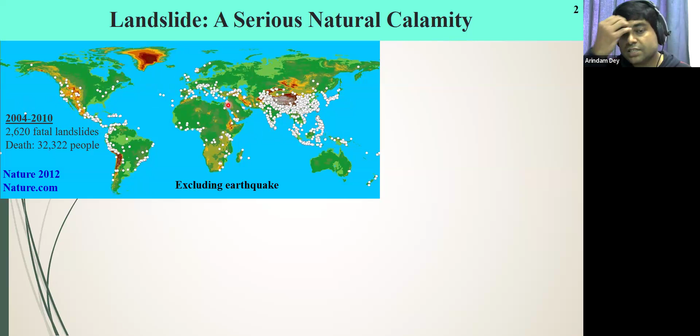India, China, the Southeast Asian countries, the western coast of South America, North America, Panama, all these places are severely affected by landslides. Italy, France. So wherever we have these mountainous terrains, we are basically looking into the potential threat from landslides. Mind it that this map does not include the earthquake-induced landslides. So many of the other regions would have been covered by those white dots.

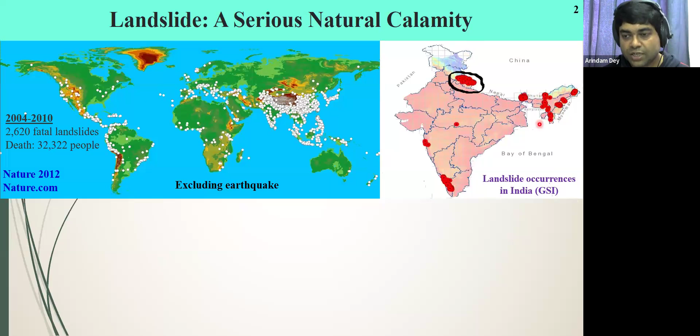Some examples which we come across in the news, the literature, the documents, the media articles. All these sorts of landslides and catastrophes create a lot of havoc, not only to the infrastructure, but also to lives and the economy. And in most of the cases, if not all, the population growth, the urbanization, development in the difficult terrains, one way or the other cause such landslides. And over the years, the number of fatalities keeps on increasing.

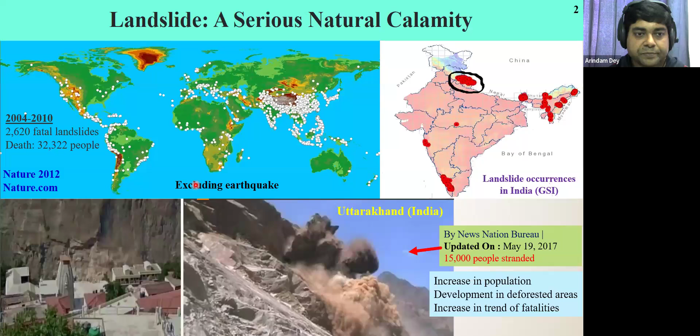And as geotechnical engineers, we are supposed to look into some of these issues and problems and try to avert them as much as possible. We cannot stop it from happening, but we can definitely take many necessary steps to minimize its effect. But those are discussed mostly in terms of soils and earth flows, mud flows. Now, when we come to rock slides, this presents a very unique feature. In case of soils, mostly we consider them to be homogeneous, or heterogeneous in some advanced contexts. But in rock, the feature of discontinuity presents a very complex structure to be handled.

And frankly speaking, the fundamental ways of slope stability analysis, how we handle soil or earth slopes, many a time do not really work for rock slopes, especially when discontinuities and joints are present. Just to show a few examples. So this is a jointed rock. You can see it's a huge mass of batholith. So we have intact rock, but through the intact rock, the joints are passing. Now, if you have to analyze such cases, you have to take into consideration the characteristics of both the intact rock and the joints, which we generally do not consider in slope stability analysis for soil or earth slopes.

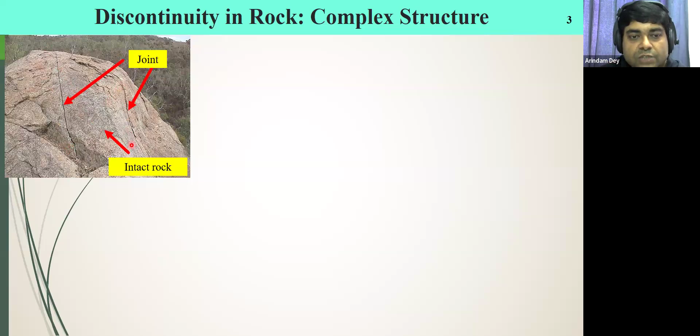And this is only a rock with intact rock with two joints, which you can visualize. It can increase in complexity when we talk about the joints, their intersections, as well as the bedding planes, which all come from the formation of the rocks and upliftment of the rocks during the prehistoric era. So these interactions now create a very complex situation.

So neither is it a continuous medium like soil, nor is it a completely discrete medium of two different elements. So it lies somewhere in between. And whenever an engineering problem comes which does not follow the binary rule, either this side or that side, then the problem keeps on increasing for us.

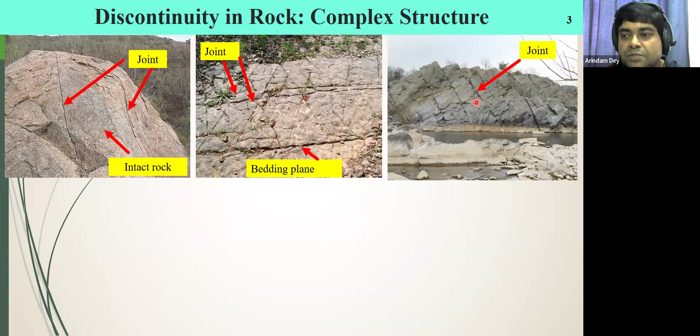This is another such jointed system, which we call a cascading book fall. So if you keep the books in the rack of the library or your almirah, and if you just push them, they just drop over one another and take such a shape. Now, such types of jointed rock systems are present in many places, creating difficulty for us in how we should analyze them. Our normal slip circle method, Bishop's method, may not be able to handle all these situations.

You can increase the complexity by placing the joints more closely. So here you can see a closely spaced joint system, and imagine that you have to solve it through a friction circle method. It's virtually impossible, because each of these joints might give a shear plane or might emerge into a failure plane, and it may not follow a slip circle type of definition.

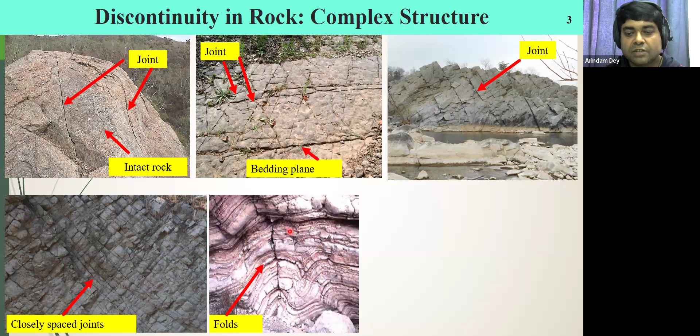Then come folds. So you understand folding and faulting, the way the Himalayas are built by upliftment due to the pressure from both sides, and that leads the depositions to bend over areas; anticlines and synclines are created, cleavages are created. Now, if such a situation arises, there will already be planes which are weak in nature, but which will not really act like a slip circle or a non-circular slip mechanism. So it will be a very complex mechanism to deal with.

And then comes a very difficult subject to handle, which we do talk about in soil mechanics but do not literally use that much for slope stability analysis, but which we cannot avoid for rock slope stability, that is anisotropy. Now, because of the presence of these joints oriented in various directions, the strength actually varies with the direction.

So the anisotropic strength, if we really have to incorporate it into our understanding, is not an easy cup of tea. We have to take core samples of rocks from various locations, and then we have to do anisotropic strength tests to figure out how the strength changes with the change in the inclination of the joints and the change in the direction of dip of the joints. And if we really want to understand them, we have to do those exercises and bring them into our numerical models, which is not really very easy.

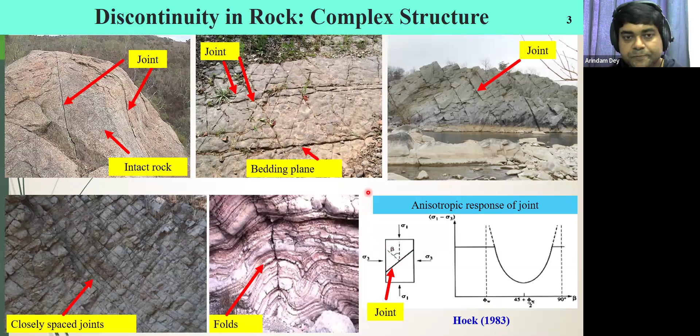It is taxing, it is computational, it is resource crunching. So all those things are somewhat hindering us from moving ahead to our next steps. So when we talk about rock slope failure, as I was mentioning, it is not really, as we understand, a soil slope failure. Here the mechanism remains a bit complex.

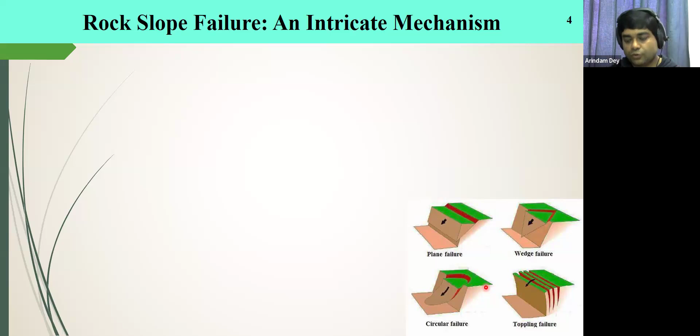There also might be cases where circular or non-circular slip types of failure happen, as in soil, for specific cases. And then there can be toppling failure as well, so big pieces and chunks of rock just falling over their toe or overturning over their toe. So understanding that all these different mechanisms can happen, a single direction of thought as we use for soil slope stability analysis might not be enough.

So if such types of planar sections exist, a sliding type of failure might occur in such slopes. In those cases, you can do a translational failure analysis or a sliding failure analysis, as we sometimes do in soil mechanics for very stiff types of material.

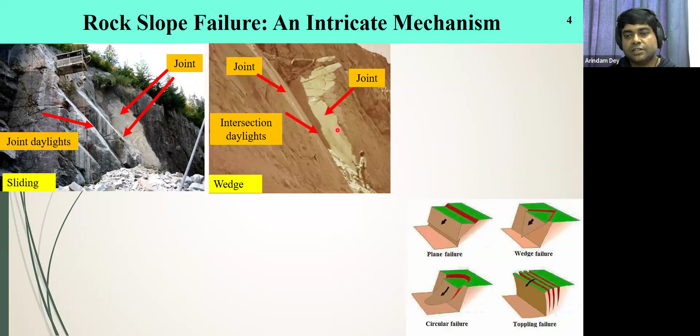Now you can have 2 joints literally crisscrossing with each other. So there will be a piece of material which can come out, which is remaining attached to 2 sets of joints. And this intersection daylight can release the material during its specific condition. So this type of failure is considered as a wedge failure. And here also you can apply some basic mechanics and then you can find out whether one particular wedge will come out or not.

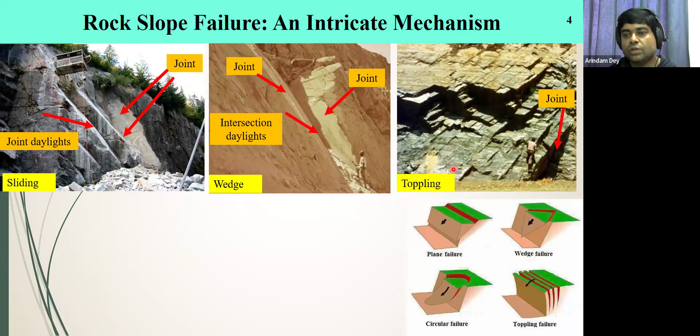But then problem starts as more and more joints start to intersect. So as more number of joints intersect with each other, the formation of intermediate chunks increases. They can just fall over their toe like a topple. So they just overturn about their toe, and that can lead to a toppling failure, which really we do not do in any type of soil mechanics slope stability analysis.

As I was mentioning, there might be cases where there will be circular failure or non-circular failure, more alike soil mechanics type of slope instabilities. When the rock is soft or highly fractured or the spacings are so close that they construct a homogeneous rock mass, then we may see such type of failures. But then the solution of such failures is not as easy as we do for soil mechanics, because here grains or granules of rock will be actually falling down together. So it is more like a particle flow which has its own impact and momentum during the flow, and that has to be addressed during the stability analysis.

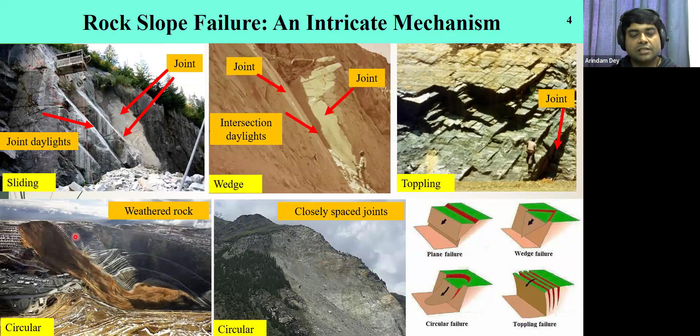So although it looks similar in visualization like the soil slope stability, we may think that we will simply do a circular failure analysis, but it is exactly not so. Here we have to deal with the particle flows, which we generally do not consider in soils because the soil particles are much smaller in size. Here we have good size, big size particles all coming down together, giving an apparently circular or non-circular failure surface.

So when we talk about rock slope stability analysis, because of the variations and the existence of different scenarios in the rock slope, which had been constructed or formed over the years, the rock slope stability analysis also has different vistas. We can start from very simplistic qualitative understanding of stability to a more complex quantitative understanding. So we generally divide rock slope stability analysis into a few categories depending upon what we want to do, depending upon the rigor we want to achieve with the analysis.

We have a few conventional methods. Among the conventional methods, we have 2 or 3 different types I will mention. And over time, we have developed numerical methods, which keep on developing or evolving over the years. So we are trying to move as close to reality as possible, but it is not so easy, and we are still lagging far, far behind reality.

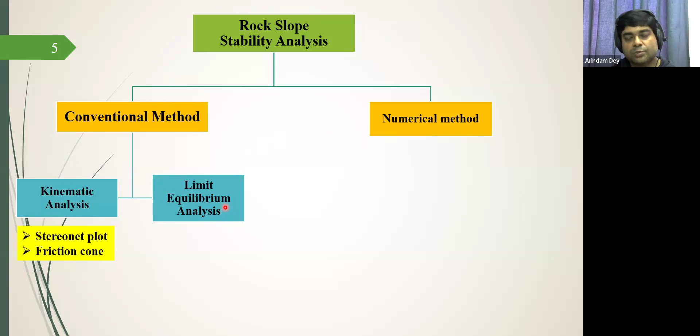Among the conventional methods, we have a method called kinematic analysis, where we do only a force-based analysis to try to get some idea whether there is a potential of failure in the rock slope system or not. So in that case, we do some stereonet plots, some friction cone analysis, where we just do some force-based equilibrium. And then we have our conventional limit equilibrium analysis, which I guess all of you are well aware of. Whatever we do in soil slope analysis, mostly limit equilibrium, the Bishop's method, the Morgenstern's method, the Spencer's method, friction circle, all those are under the umbrella of limit equilibrium.

Here also we can use them, but keeping in mind that the failure surfaces might be different. There might be a planar surface, then we have to do a planar sliding analysis. There might be an intersection wedge failure, we have to do wedge analysis. And as I showed, there can be situations which apparently look like a circular or non-circular failure. So there we can do slip surface analysis. This falls in the simplistic part of the assessment.

In the numerical methods, now we can do continuum modeling. In the kinematic or limit equilibrium analysis, there is no concept of deformation. You either balance the force, or the moment, or the stress, or moment and stress, but deformation never comes into the picture. So conventional methods are more like rigid body analysis, where there is no deformation. But we very well understand all our geomaterials deform.

And if we really do not consider deformation into our analysis, then we might be actually moving away from the reality. All the cases might not be able to be captured. So to capture those cases, we have continuum modeling, where we devise the rock as a continuum system. And then we can resort to the tools like finite element, finite difference, boundary element, meshless methods.

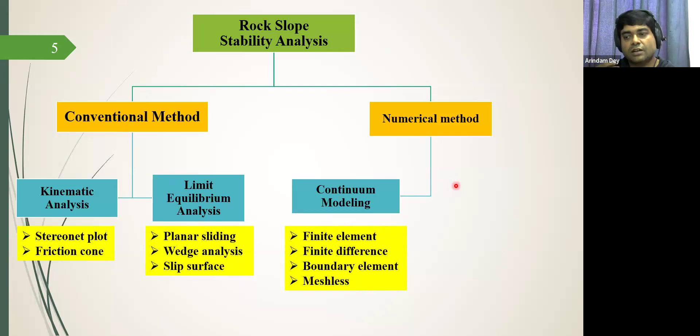And in all these cases, it is a coupled stress deformation analysis. So deformation starts coming into picture. So now deformation will modify the stresses, and accordingly, we can do the slope stability analysis. Going ahead further, if we want to really look into how each pieces of rock are contributing to the stability and what are their influences towards instability, then we go for a method which is called discontinuum modeling.

So in the discontinuum modeling, as the name suggests, here we go to the rock particle level or rock block level and start looking into their mechanics and their interactions. So the methods which we generally use are distinct or discrete element method, where each block and their interaction can be modeled. A discontinuum deformation method, where we model the blocks, but only in terms of their deformation-based assessment. And then we can hybridize them so that both stress deformation coupling can be done, and we can go ahead with a very advanced discontinuum modeling.

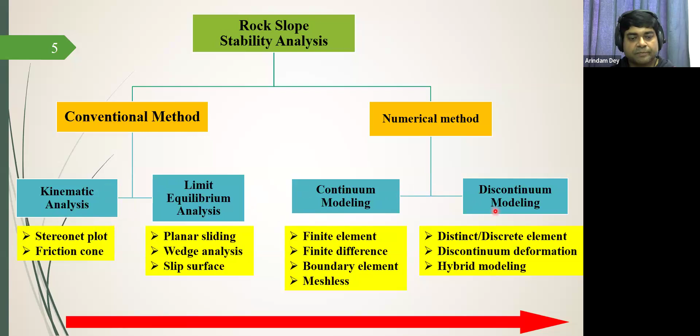So moving from left to right, we are basically making things more and more complex. So we are adding complexity into the analysis, but probably that's what is needed if we want to capture many of the real life rock failure cases, especially in the jointed scenarios. So we are increasing the complexity, but that is only helping us move closer to the reality. We are lagging far behind the actual reality, by the way, even as of now.

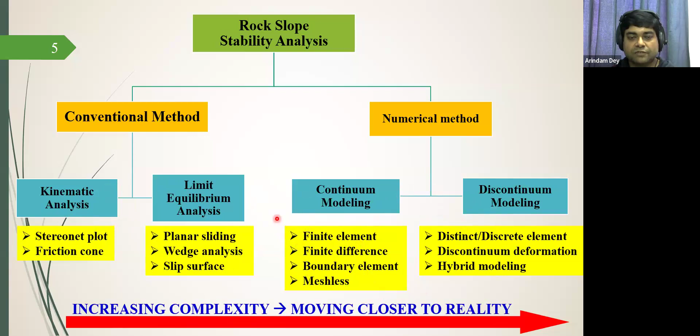So this entire discussion, what we are going to look into in these next few slides, or the rest of the discussion, will hover around the software which is called Rocscience. So it is a fantastic software which has many modules, and each of these modules can solve a specific problem related to rocks and soils. It was specifically developed for rock related issues. Now it has been also transgressing into the domain of soil stability or soil instability analysis.

So Rocscience is not a free software. Rocscience is a purchasable software, but you can always get some academic licenses, or even student trial licenses are available upon request from your institute ID. Actually, you can request the agency, and for a few months or maybe a year, they can provide that upon specific request from the institutional level.

So first, we will look into kinematic analysis, which uses a module of Rocscience known as Dips. So here we only try to figure out whether there is a possibility of translational failure or not, either in a planar manner or through a wedge, and nothing else. We do not go into any further complexity at all. So in this particular case, we have to remember our old geological text where we talk about dip, strike, the dip direction, plunge direction, dip angle, strike angle, rake. So all those things related to rocks and their interaction at the geological level, you have to again recall those terminologies.

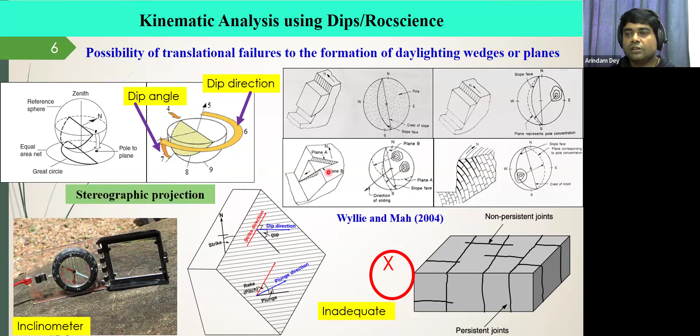So that's where the kinematic analysis sometimes becomes inadequate. But having said that, we always start with kinematic analysis, because that at least gives us the first idea whether there will be a planar failure or a wedge failure, and then we can move on to further complicated or complex scenarios.

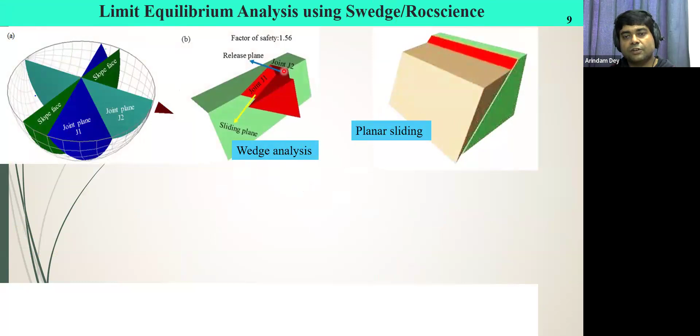The next is limit equilibrium analysis, and the module of Rocscience which uses this analysis technique is called Swedge. So this is more like a wedge type of analysis under friction. It is a limit equilibrium wedge analysis, and you can use it either for planar sliding or where a mass of rock is sliding in the form of a wedge. So wherever there is a rigid mass of rock moving over either single or two sets of joints, you can use this module Swedge in Rocscience to figure out their stability in terms of the factor of safety.

Now, in case of slip surfaces, you can use Swedge, but Swedge does not give so accurate an understanding of the factor of safety in a continuum system where we can get a circular type of failure. It is more practically used for this type of rigid joint failure. As I was mentioning, if you have a very heavily jointed rock system, that can still give a circular or a non-circular slip type of mechanism.

But in all these cases of limit equilibrium analysis, we consider that the mass which is moving is a rigid mass; there is no deformation in the system. So a rigid body moves above the slip surface, whether planar, wedge, circular or non-circular. And for the factor of safety against stability, the way we find it for our soil mechanics slope stability problems, we get one single factor of safety, which inherently means the factor of safety remains constant through the entire failure surface. So that is an inherent limitation of limit equilibrium analysis itself.

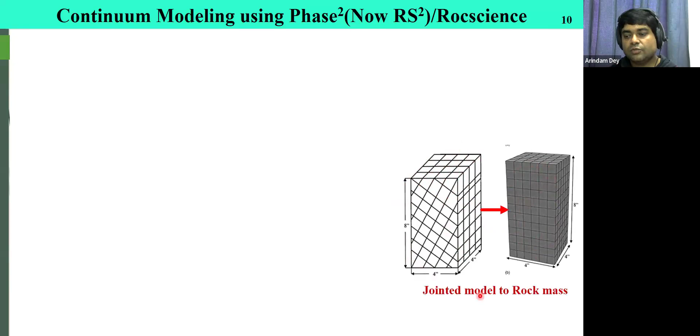In this particular module, we can represent a fragmented rock or a jointed rock system as an equivalent homogeneous mass. So while doing continuum modeling, we have to remember that we are still not considering fragments of rock. Rather, if they are fragmented, we represent this jointed set in some manner as a homogeneous set of rocks. So here we move from a jointed model to a rock mass. But how is it different or advantageous compared to the earlier case?

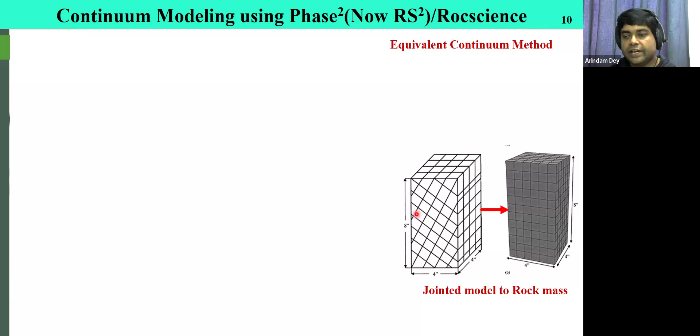Here we will be introducing deformation of each of these blocks, which we could not have done in the earlier two, kinematic and limit equilibrium analysis. This method is called an equivalent continuum method. So we are creating an equivalent continuum system from a discrete system, and that's why this equivalent word comes into picture.

So in the equivalent continuum method, when we have to use this, let's say through finite element, finite difference, or whatever tools, we have to have equivalent rock mass parameters. So you can test pieces of rocks, get their fragmented parameters, but finally you cannot use those in such a model. You have to find out equivalent rock mass parameters, because even though joints are existing in your model, in the equivalent continuum model, although you are drawing those joints through the geometry lines, they are only geometrical inclusions. We are still creating a homogeneous system. We are not really considering the joints actually affecting the system unless and until we do some joint material analysis.

In this case, we use a technique of stability analysis which is called the shear strength reduction technique, mostly similar to the stability analysis in terms of what we find as factor of safety. Although here our terminology is not factor of safety, but strength reduction factor. And how is it different? How these two methods are different, I will show in one of the slides later.

So this equivalent continuum method might not always be appropriate to use. It is appropriate if you are carrying out the analysis of rock slopes that are either composed of massive intact rocks, so a huge single or dual rock system, if they are made up of very weak rocks which can get crushed under load, or if they are heavily fractured rock masses, so that the homogeneous system can be as closely achieved as possible. If the system is not homogeneous, if it does not follow these criteria, then you can still use the equivalent continuum method. Nobody can stop you from using it, but your results will always be a bit questionable.

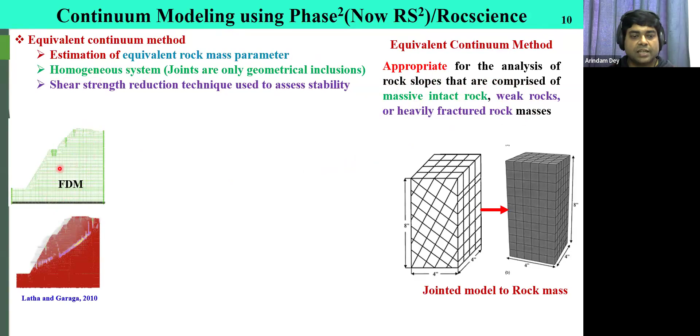So as I was mentioning, in this continuum modeling, you can model the entire rock slope and then analyze it through the finite difference method. You can use the finite element method. And then through the shear strength reduction technique, you can figure out through which joint locations the failures will take place. So you can see that it is not really like a slip surface, which we are very keen to see in case of slope stability analysis. Here, failure surfaces develop through those joints, whatever we model in the equivalent continuum method.

Now, there have been advancements in the equivalent continuum method as well. You can not only model it as a homogeneous system, you can even model the joints so that you get a better idea than the historic equivalent continuum when it was initially started. I will show this through one example.

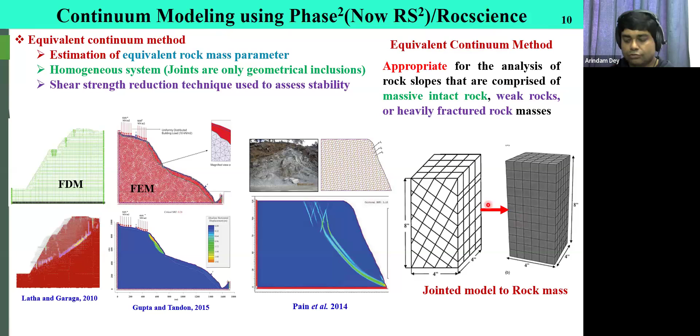And the latest one, the most complex one, but again, closest to reality, is discontinuum modeling of the jointed rock slope, where we now start looking into the blocks of rocks and their interactions and failure. And now this anisotropy created by the joints, the change of strength in different directions, change of shear condition in different directions, which leads to structural failures, can be modeled in discontinuum modeling. But imagine that now you have a rock slope which you could have modeled by limit equilibrium or a finite element method. Now you have to figure out how each rock piece is interacting with the others, and only then can you go ahead with discontinuum modeling.

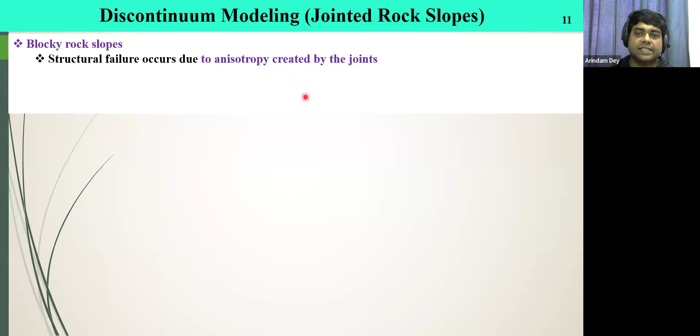So if you are trying to handle a very complex situation with discontinuum modeling, again, you have to go back to some assumptions, which hinders or curtails the exact understanding of the problem, but it gives a fair idea. So for example, here is one such paper you can refer to, Kainthola et al. in 2015. They have modeled through the discontinuum approach, where they can find out how each piece of this jointed rock system can move, what is the direction of movement, what is their velocity of movement, how long it will take for one block to fall over or move to a certain limit beyond which we can say landslides or rock slides have triggered. Those things can be understood.

So this is the structure of Petra. Hatzor et al. in 2004 analyzed the structure of Petra in the form of discontinuum modeling, and they found out, if it fails, how the failure scenario would take place. Here you can see each of these rock blocks can be located from its initial to its final position, and now the failure is not like a continuum system, it is like a discrete system. Each rock block can be traced to its final position during and after the failure.

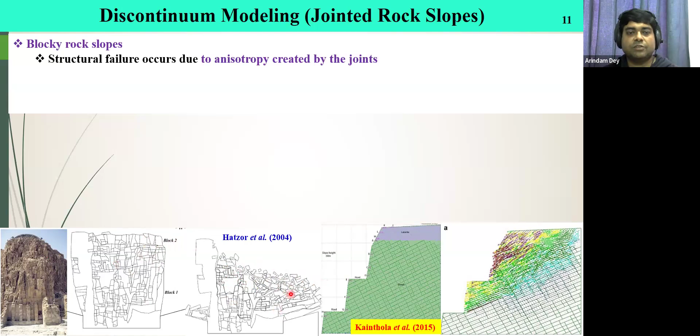So here we are using this discontinuum modeling for prediction of the behavior of jointed rock slopes, and two very popular techniques are discontinuum deformation analysis. So it is more like this one, the one which Kainthola did. So here they are not literally detaching from each other, but still it is a deformation taking place in a discontinuum system. Or one can use a distinct or a discrete element method, which is more pertaining to what Hatzor did, where each rock block movement can be traced.

Distinct and discrete are more or less the same, except that in distinct element method, you actually model bigger chunks of rocks. In discrete element method, you can go to the particulate level, which I showed a few slides ago, that you can actually do a particulate level analysis that can be done through discrete element method.

So here the challenge increases because the stress strain interactions we have to consider with the incorporation of explicit joints, which means that we have to define all the joints, their material characteristic, their properties, allow one joint to detach from each other or slide against each other independent of the other one. So that's where the challenge becomes more, and we need actually a very sincere effort in the investigation part as well to model such scenarios.

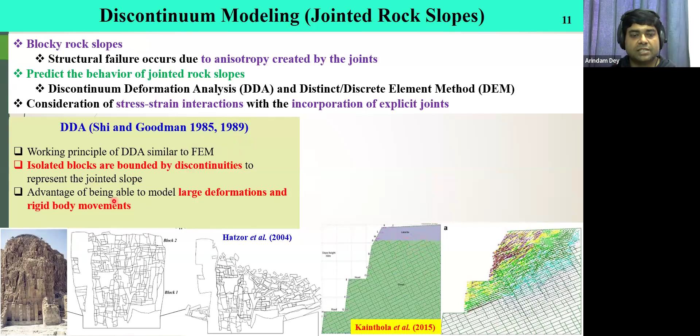Just to mention that DDA, the discontinuum deformation analysis, was invented long back. So these techniques are not new. These techniques are quite old. It was presented in the 1980s, where isolated blocks are bounded by discontinuities, as in Kainthola. So the isolated blocks are there, they're bounded by discontinuities, and they can model large deformation and rigid body movement. So you can make it as flexible blocks or rigid blocks. So both these things can be accommodated.

Whereas distinct element method is still older. It is from the 1970s, where discontinuous rock mass can be assembled as quasi-rigid as well as deformable blocks, like what Hatzor did in this particular exercise, where each of these block interactions can take place either at the beginning or after falling down. One block which is interacting with the earlier blocks may not interact further. It starts interacting with a new block system. So all those complexities can happen. And then it is very proficient in simulating very large displacement due to slip or opening or detachment, everything.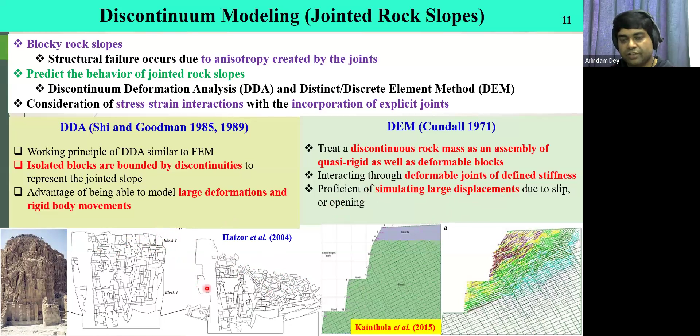So here comes that when you slowly move ahead to understand a bit more realistic scenario. So one thing I think is now clear, that we have to explicitly define the joints. And if you are able to define the joints and their properties, then we are moving much closer than what we were achieving through the limit equilibrium method. So there are various types of joint models. One very popular one is the explicit joint element model given in the 1960s. The development of such explicit joints has been done in metal deformations and composite materials, but slowly we have started using them for this type of jointed rock system as well.

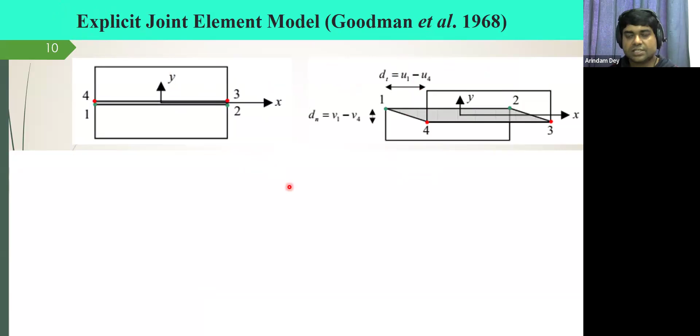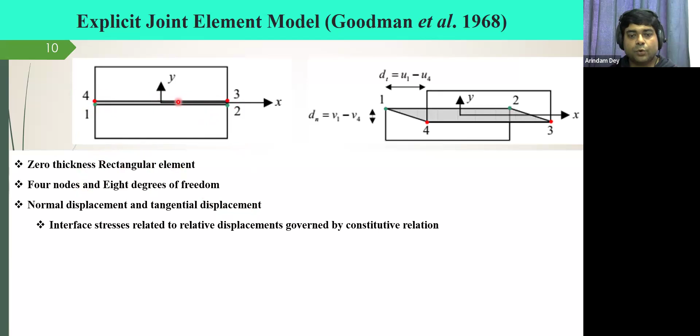Just to mention these elements, the small element 1, 2, 3, 4 what you are seeing here, this is the interface element or the explicit joint element. It is of 0 thickness mathematically. It is a rectangular element having 4 nodes and 8 degrees of freedom. Interesting thing is that this element can be given both normal displacement and tangential displacement, and that can control the movement of these two blocks attached through this joint. And then the interface stresses all depend upon the relative displacement between these two blocks, and that is governed by a constitutive relation. So you have to know a little bit of the constitutive relation. Such relations are Hoek-Brown, Barton-Bandis, and many others.

Now, if you are trying to understand how rock block deformation takes place, at one point of time you have to try to assess whether they will be detaching or not. Now, if they are detaching, you cannot do it like a finite element system where the tangential and normal displacements are always coupled. Here, through this explicit joint element, you can uncouple tangential and normal stiffness, which will lead to the fact that the shear and the normal deformation will be independent of each other.

Now, if they are so independent of each other, there might be a situation where tensile stresses develop, and we understand that soil or any geomaterial is weak in tension, so the joint will detach. So if the joint normal stress is tensile, both these stiffnesses are set to 0 for modeling purposes, and that leads to the opening of the joint. So what we were seeing in the Hatzor structure, that one block is detaching, that type of opening we can actually achieve through this explicit joint element.

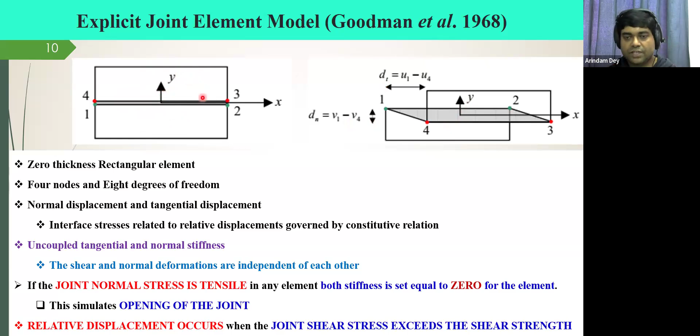So I will basically show two case studies, one for static stability analysis of a jointed rock slope, another one a dynamic stability analysis of a jointed rock slope. For the static stability analysis, I will show you the Sikkim Himalayan case study, which we worked upon for a highway, the Gangtok-Lachung highway passing through North Sikkim.

The study area becomes very important, as this is one of the major transportation corridors serving our northern territories and even the border territories. And this area is highly affected by rock slope failures, rock slides, rock fall, rock topple, everything is present there. And most of the times, these areas get heavily affected by earthquakes. You remember the Sikkim earthquake, the Nepal earthquake later on. Recently, the Tibet earthquake happened.

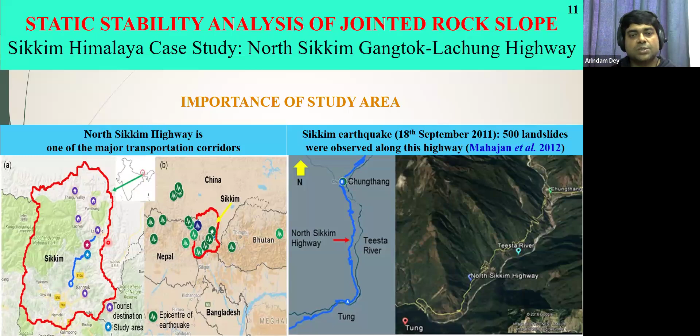And if failure has not taken place during the earthquake, what happens is that during the earthquake, all those blocks get basically shaken up, their strength reduces, and they are ready to fail for some future events. May not be an earthquake, maybe a small hill cut, maybe a small rainfall, and those things are very common in the study area.

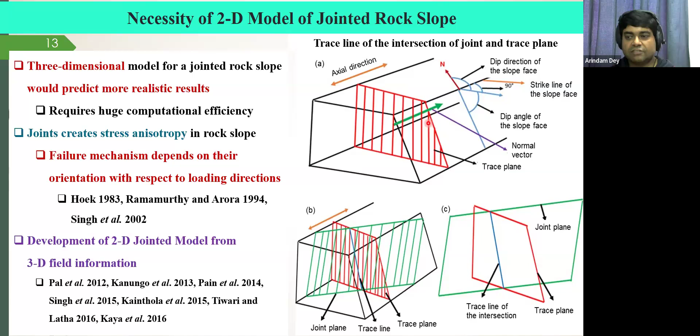So all these exercises you carry out, finding the trace plane and projecting the different joints in the 3D to the 2D over the trace plane, are basically an engineering drawing problem and nothing else. You just need to practice it to get the results properly.

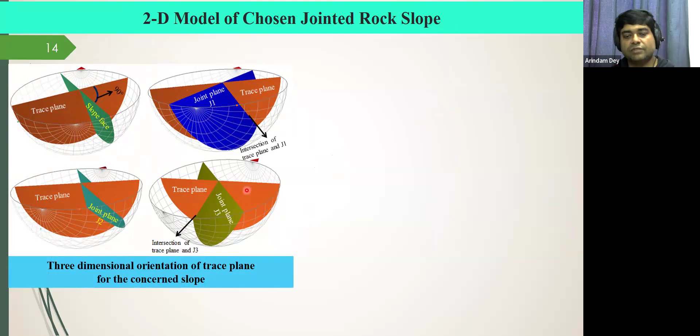So let's say when we have these orientations, we find out the trace plane over which we want to work and figure out how the slope face will project on the trace plane. If there are 3 sets of joints, as for this particular case study, how joint J1 will project on the trace plane, how J2 and how J3 will get projected on the trace plane for the concerned slope. In that way, we create a 2D trace plane model from a 3D jointed rock system.

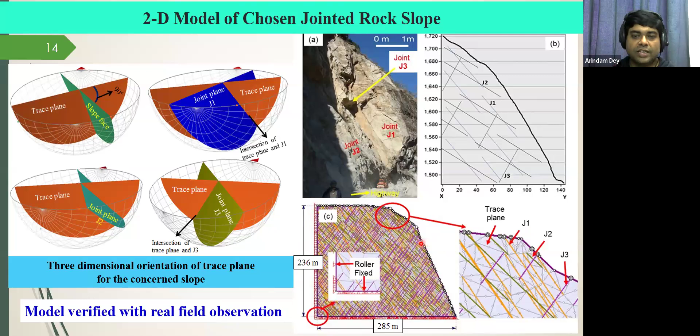There is some debate, especially for jointed rock slopes, whether we should keep the bottom boundary completely fixed. Not necessarily. You can free it up to some prescribed displacement as well, but you cannot free it up totally. Otherwise, your model will run here and there like a rigid body, and you will not necessarily get the desired outcome from your exercise. For this particular case study, some geotechnical details are necessary.

As I was mentioning, we have to find out the equivalent strength parameters. In case of rocks, the failure criterion which we use is not really the Mohr-Coulomb one. For the rock system, we use a criterion given by Barton and Bandis in 1990. It has the feature of a Mohr-Coulomb representation: tau equals sigma tan phi plus some cohesive component, but the representation is a bit different. Here, the factors which affect the shear stress generated in the rock are the overburden pressure or the normal stress. Phi r is the residual friction angle.

Remember, it is not the peak friction angle as we consider for normal soil mechanics problems, because rock slopes or rock joints will move only when the residual strength is exceeded and not really the peak strength. The reason I will tell later in one picture. JRC is the joint roughness coefficient. You have to figure it out from the test on the joint material. JCS is the joint compressive strength. So JRC and JCS are the parameters of the joint. Phi is the parameter of the rock body.

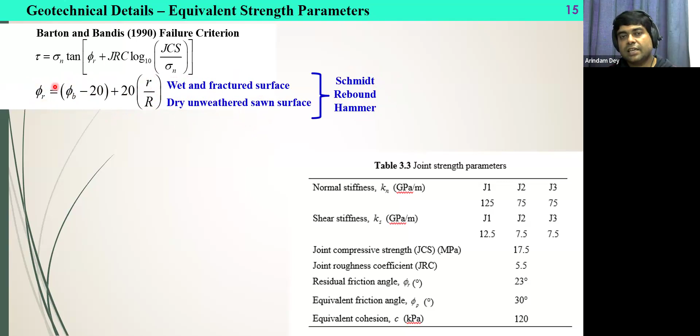Now, how to find out the residual friction angle? We need a very tedious high strain experiment for that, but we do not always do that. We can still find it from the basic or peak friction angle from such expressions, in relation to a special type of test called the Schmidt rebound hammer test, which can be carried out on a wet and fractured surface as well as a dry unweathered sawn surface. Combining all these, you can find the residual friction angle with much less exhaustive experimentation than finding it directly from a shear experiment.

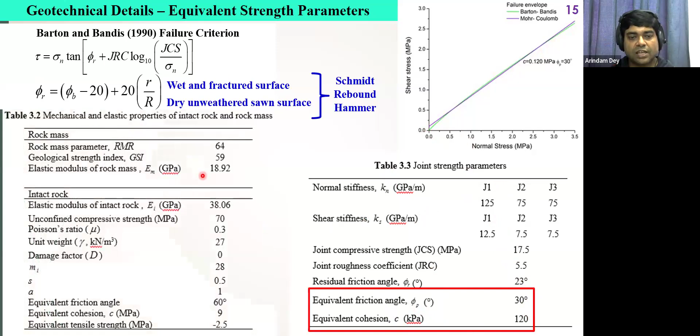Then over that, we fit a linear Mohr-Coulomb failure envelope, and we get the equivalent friction and equivalent cohesion for the joint strength. Same exercise we do for the rock mass and the intact rock as well. In this case also, we go ahead in the same way and finally figure out the equivalent friction, cohesion, and the tensile strength.

Someone may ask, why so much of equivalency? Because we want to make our life simple. Because if we want really to model with all these, we really have to go to the discontinuum system. And I think I have already made it clear how complex and a bit difficult it might be.

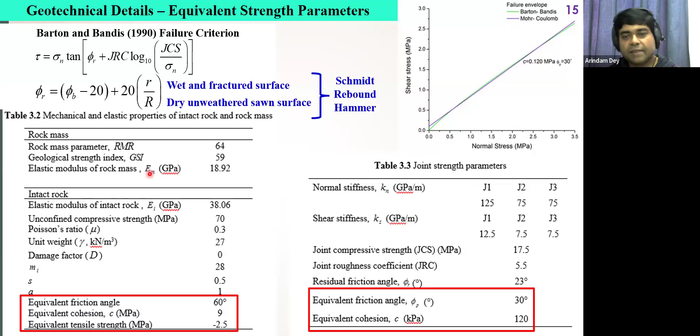So as usual, we carried out the kinematic analysis of rock slope for our case study, and it showed that J2 is the weakest joint. Through this kinematic analysis, we understood that J2 is the weakest joint, and in this particular case, for the Sikkim Himalaya highway, the joint J2 is the most vulnerable. That means there will be a planar sliding failure along J2.

But when we looked into the strength reduction technique, we understood that something is not truly represented through this exercise of finding out the poles and then finding out the sliding failure through kinematic analysis, which says only one joint is vulnerable. In this picture, we can see that there is a wedge type of failure, and it is not really a single planar failure along one joint. So even though kinematic analysis showed one single planar failure,

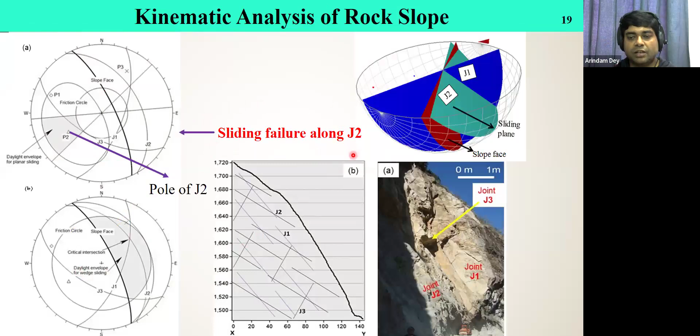the picture from the very site itself doesn't reflect that. So then we went to the shear strength reduction technique, considered all these joint sets, and used a particular method to figure out what can be the strength reduction factor to understand the failure condition. This is similar to how we find out the factor of safety. There is a slight difference.

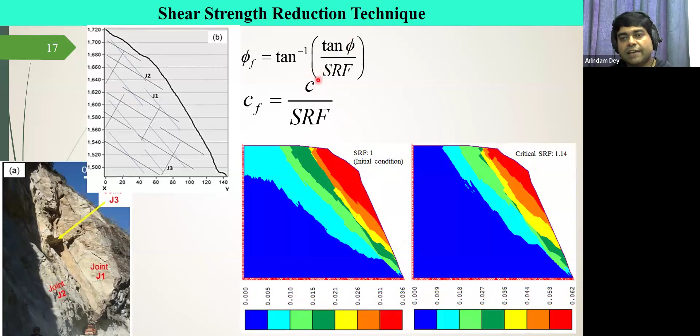In factor of safety, we figure out the ratio of strength and stress. Here, we do not do that. Here, we figure out the reduction of the shear strength parameter itself. So we start from an initial condition with the available equivalent C and phi, which we obtained from the previous exercise from Barton-Bandis to the equivalent parameters. We get equivalent C and phi that represents an SRF of 1.

And then we repeat the analysis of the same model under static stability, each time reducing the C and phi by a particular factor SRF, strength reduction factor. So we may reduce it by 1.2, 1.3, or if you want to increase, you may divide by 0.9, 0.8. And this way, you figure out under what coefficient these actual parameters can be reduced to such an extent that failure takes place. So in this way, we figure out whether the slope is susceptible to failure or whether it will be stable.

For example, for this particular slope, the critical SRF became 1.14, which is above 1, but generally we say SRF less than 1.5 for static condition is susceptible to failure. So this slope is not really stable under the given condition, and exactly that happened at the site. There was a failure.

Now, interestingly, these dotted black lines are the joints through which the failures have taken place, identified through these shadings and contours. We have put J1 over these diagrams, and then J2, and we can see from these contours that some locations are more prone to J2 sliding failure. Some locations are more prone to J1 sliding failure. J3 anyway is going inside the rock slope. It does not affect as such.

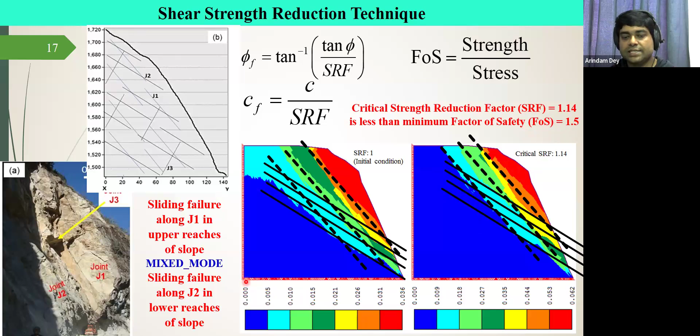So which gives us an important understanding that if for jointed rock slopes we do a homogenized type of slope stability analysis, then we may actually land up in a different sort of result, which might not be properly correct. So here, the minimum factor of safety was given as 1.5 from a homogeneous system, which basically indicates that the slope is all functioning well. There is no failure in the system. Whereas in the case of the strength reduction factor, where we consider the joints, we find that it is much lesser than 1.5 and the slope is vulnerable.

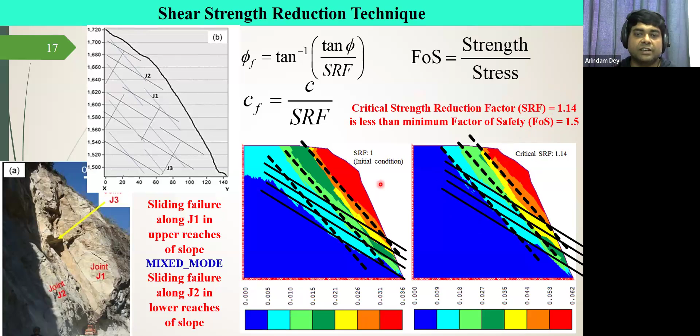Next, I will show the dynamic stability analysis, what we can do in such case, what information we can get. This is a case study from the Garhwal Himalayas, and this is again a highway which basically passes from Rishikesh to Badrinath, the National Highway 58. Again, on this particular stretch, we did some numerical exercise. Again, it is very important. It is a place where all our pilgrimage takes place.

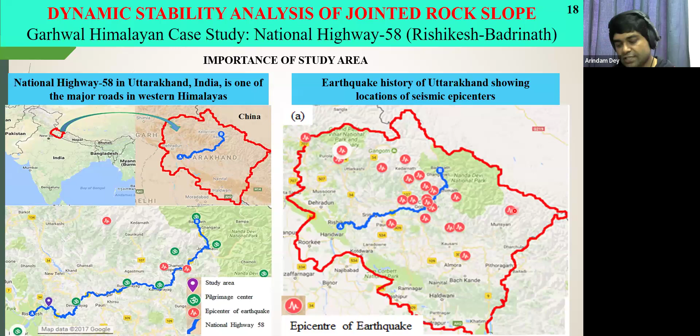And again, being in the Garhwal and Uttarakhand Himalayas, it is very prone to rock slope failures. And again, this has an earthquake history. There are many epicenters around, and the scenario, as I described for the Sikkim Himalayas, also gets prevalent in this particular stretch as well. Now, when you do dynamic analysis, things become a bit more interesting in the sense that now we need to understand how the seismic wave passes through the jointed rock. We do dynamic slope stability analysis as well for the soil slopes, again through a homogenized system, but this presence of joints here makes things more interesting and challenging.

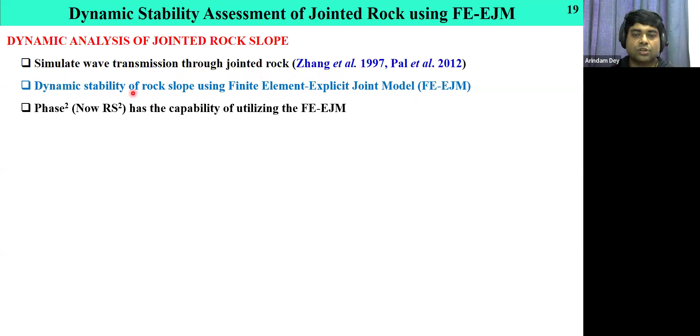Now, for this in RocScience, you can use RS2 in its seismic mode using the explicit joint model, which I have described earlier. You can use both of them in tandem to figure out the dynamic stability assessment of a jointed rock system. There are some things such as Cauchy strain definition that has to be given there. So those nitty-gritties you can always work out when you work with the actual software model. Interestingly, this RS2 has got very well developed over time. It is still under development.

It produces quite accurate results up to a strain of 1%. At 1%, not so much nonlinearity develops in the system, but you can always do a rigid block movement through this 1% strain itself. Deformations you can predict even in the lower strain limits. We generally say that in very low strain there is no deformation, but that is not true in case of a heavily jointed system. Always there will be micro deformations that also need to be understood, because micro deformations accumulate to give the major catastrophic failure.

Now, one question always arises: okay, fine, I am doing all these analyses and finding out what is the deformation in the rock slope system. When shall I consider it to be failing? Because in a rock slope system, it might not always be the stress-based failure which governs, as in the case of soil slope. Here, deformation can also lead to a failure even before the stresses are mobilized. So in general, it is said that if there is a seismic event, and after the seismic event there is 50 millimeter or more of deformation happening, that is basically a limit beyond which we will say that rock slide will be triggered.

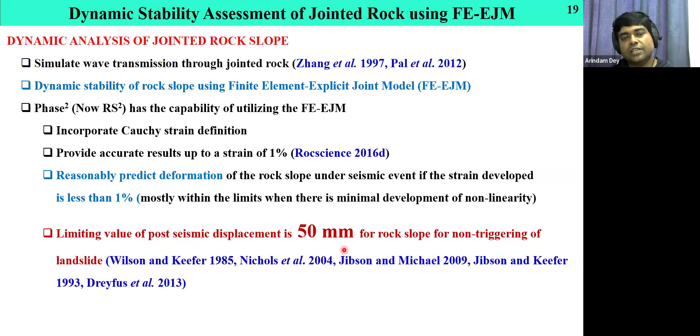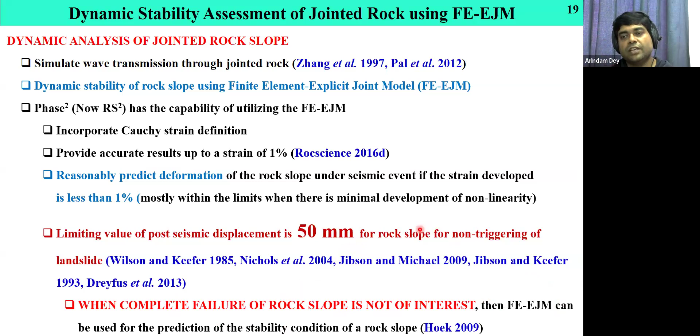So if that is lesser than 50 millimeter, say 40 millimeter, we say that the stresses are not yet mobilized and rock slide has not triggered, but that might actually lead to a fall of a few pieces and a few chunks of rocks as well. Rock slide means the entire mass of rock starts moving down. So when complete failure of rock slope is not of interest, then this method can be very interestingly used, but things have been evolving. This method can now be used even for a fairly good amount of rock slope failure, if not the complete failure.

Whenever we do dynamic analysis, first of all, we do a pseudostatic analysis, which is a simplified version of the dynamic analysis. So I will just show this picture again from that Rishikesh Badrinath highway. So here there were three joint sets. J1, towards the road, was the most prominent, and this was a heavily jointed rock system. So there were three specific sets of joints. So this was J1, which is very slightly inclined.

J2 is heavily inclined, it is a very steep joint, and J3 is lying in between these two. Now, if you see, all these three joints are actually moving towards the road, and because of these road works, extension, excavation, all these slopes have become unstable over time, and that has given impetus to study the rock slope stability in this area.

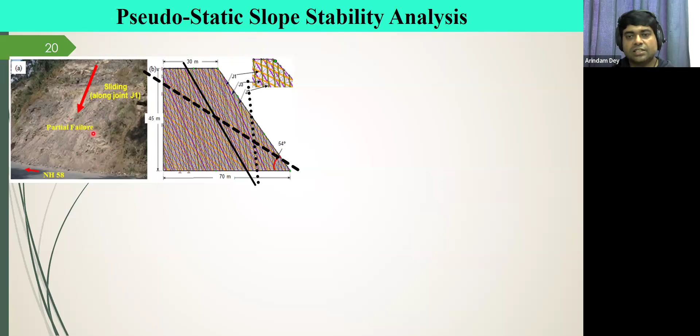So we went ahead in a similar manner. We did a stereo net projection, and interestingly, again, this stereo net projection showed us that joints J2 and J3 are the most active ones, and they will lead to a wedge failure through J2 and J3, whereas J1 was not showing any intersection. It was understood from the stereo net analysis that J1 is really not that influencing the stability failure. However, the picture said something else again, that there have been many evidences of movement over J1 as well. So there were doubts over the stereographic projections once more.

So we started with the pseudostatic analysis. Here we consider a factor called KH, coefficient of horizontal acceleration, which you can find out from your IS code 1893. You can find out KH, or if you have an earthquake motion, you know the PGA, the peak ground acceleration of the earthquake motion. When you express the peak ground acceleration in terms of g, acceleration due to gravity, you get KH. So if KH is 0, that is a static analysis.

And what we do is use the same slope and subject it to higher and higher values of KH to see when the slope starts moving towards failure. That gives us an understanding of the threshold of seismic intensity at that region which can lead to failure of such slopes. For this slope, we carried out that exercise, and you can see that beyond KH equal to 0.3, the SRF has reduced to a significantly lower level, 1.1. Under seismic condition, we consider 1.1 or 1.2 as the limiting SRF; below that value it is unstable, metastable, or if it is below 1, it is complete failure.

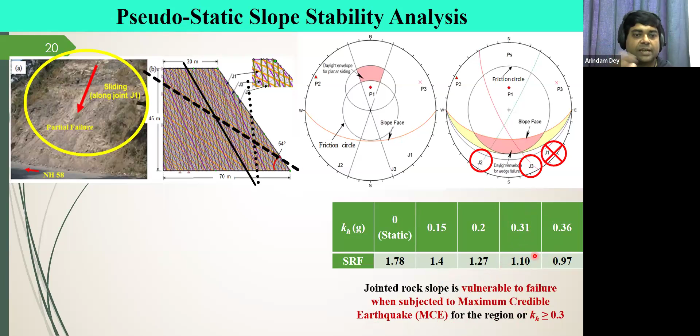So when we subjected this to the maximum credible earthquake, zone 5 as per the IS condition, we found that the slope becomes quite unstable. This might not exactly represent failure at 1.1, but as I was mentioning, it can shake up the slope, it can make it metastable, and any next event can lead to its failure.

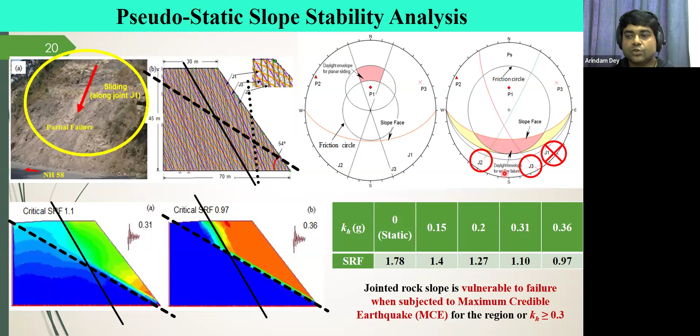So when we looked into these two cases, 0.31 and 0.36, in both cases you can see that specific failure lines are forming, but it is not like a slip surface. It is through the joints. For SRF 1.1, it is still in the greenish part. That means stresses are still holding. Whereas in the case of 0.36, SRF went to 0.97. That means it will already fail under that high motion. And interestingly, we saw that J1 and J3 are participating to control the failure of this jointed rock system, which was denoted as J2 and J3 from the stereo net, but not really, as this type of analysis brings out.

Next, we move ahead. Pseudostatic is more like a rigid body analysis, where the rock blocks above the failure plane do not have much deformation and interaction among them. So then we move into the seismic motion utilizing the time history or the accelerations for that region. We chose the Uttarkashi earthquake, which occurred in 1991. We got the acceleration profile. We did a Fourier transform to get the frequency domain response so that we know the fundamental period or fundamental frequency of the input motion.

And that helps us understand how the failure will evolve over time. Pseudostatic gives a direct failure or no failure condition. Seismic time history analysis tells you how failure will generate from its initial nascent condition to the final failure condition. In this case, again, we prepared the model with the joints. Only thing to remember is that in dynamic analysis, the boundary conditions change a little. The vertical boundary becomes a transmitting boundary; the seismic wave must pass through it, whereas the bottom boundary becomes an absorbing boundary, and the input acceleration needs to be given at the base of the model.

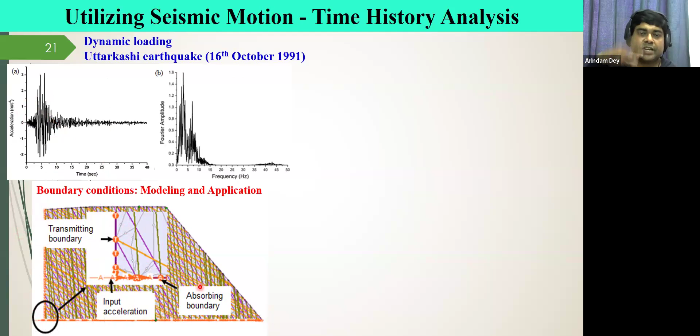So that entire model shakes up and there is vibration, and you can find out acceleration, amplifications, all those things. In many cases, we use a compliant base because we cannot directly give acceleration. We have to give it in the form of shear stresses. So from the acceleration profile, through integration, we get the velocity profile. Using that velocity time history, V(t), multiplied by the density of the material rho, multiplied by the shear wave velocity Vs, we find out the time history of stress. And that time history of stress we input at the bottom of the model.

Now, natural materials always have damping. They do not allow every part of the seismic energy to pass through. They absorb some of it. And especially when things are jointed, more absorption takes place. In general, in these cases, we use a 5% Rayleigh damping, and then we find out the Newmark's or Rayleigh parameters alpha, beta. These are standard procedures which you can learn even from the software manuals. When you develop the numerical model, you have to find out how much boundary you should use and how much mesh size you should use.

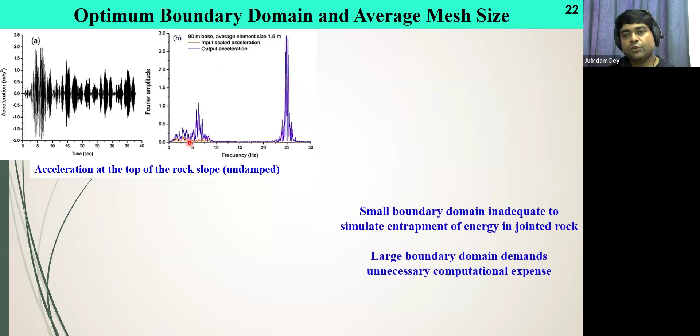So to find out the boundary, as mentioned, we give the acceleration at the base and find out what is the response at the crest or the top. We always see that there is amplification. The acceleration at the top of the rock slope, this blue line, has much higher energy than the input. So amplification has taken place. If you use a very small boundary, the boundary reflects the wave and amplification becomes more. That is not a true picture. If you have a very large boundary, you don't get that boundary effect, but your computational demand increases, and that also we don't want.

Then you have to control the mesh size. There is a particular criterion called the LK criterion, Lysmer-Kuhlemeyer criterion, after the two researchers who proposed it. You have to make the mesh size such that one entire motion passes through that mesh element and you can record the effect of the entire motion. So there should not be any missing information, which can happen if you keep the mesh size very big. Somebody may say, I will keep the mesh size very small. You can, but your computational cost again increases. So you have to bring some optimality in the boundary domain and the average mesh size.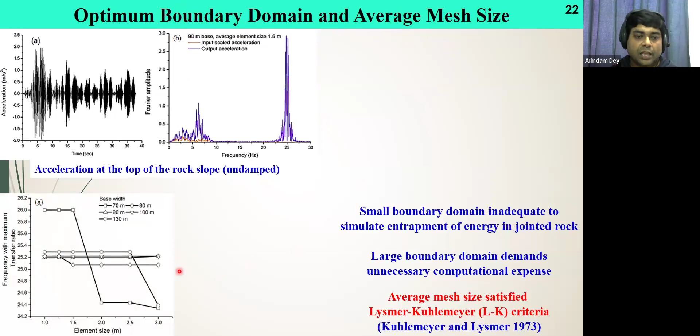So we do that exercise by varying the domain size and the mesh size, and finally figuring out what optimum values we should use. For this particular case, when we varied the base width of the model for various element sizes, we saw that around 90-meter model size things are converging. When we varied the element size, around 1.5 meter mesh size things are converging, because the entire rock slope is around 250 by 250 meter. So we have to bring these optimalities into the model. When the model is ready, you give the earthquake motion, and then you start to find the interesting responses.

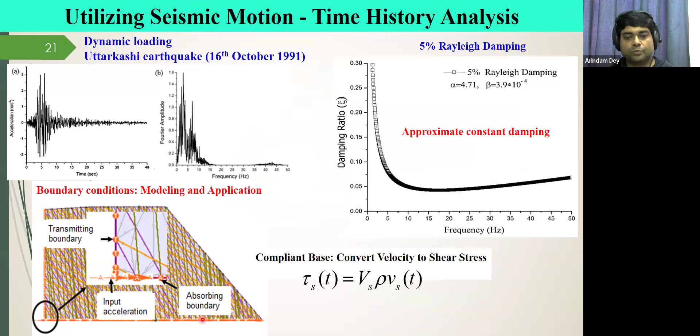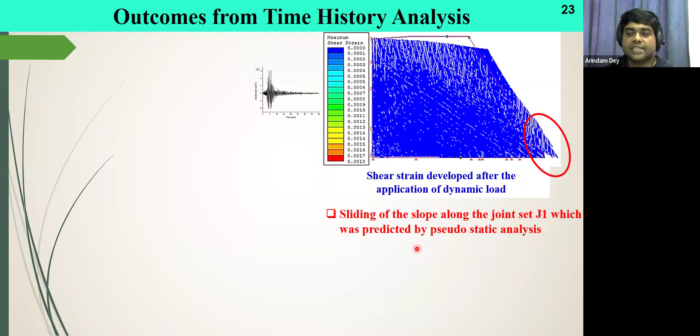At the bottom of the model, you can see some blocks have slid down over the joint set J1. So sliding of this slope along joint set J1, which was predicted by the pseudostatic analysis, is now very well captured through the deformation scenarios as well. You can see all these are sliding down from their initial location along joint set J1. Now, one interesting question is which joint set will move? We will answer that as well.

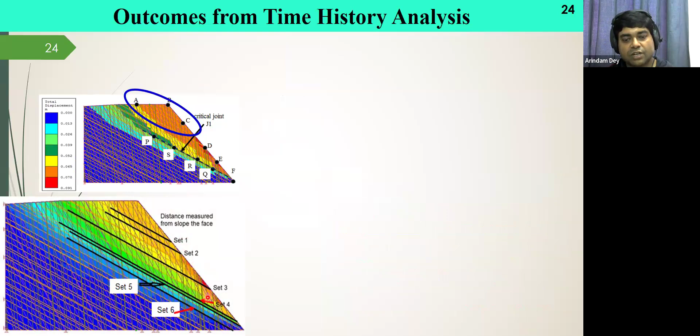So as I mentioned earlier, 50 mm might be the limiting post-seismic displacement criterion which can trigger the rock slide, and the same is happening here. If you notice here, around that region, there is a high concentration of shear strain release as well, which indicates that this top part of the slope may fail. But then the interesting question: which joint set will be critical? There are many J1 joints, 1, 2, 3, 4, and many others. Can we find which one will be critical, whether it's set 1, set 3, set 5, set 6? Yes, we can find that.

For that, we need to plot the variation of average factor of safety along the joint. Why am I using the term average factor of safety? In our conventional slope stability analysis for soil slopes, as I mentioned, we find only one value of factor of safety, where we assume that over the entire slip surface or failure surface, the factor of safety is identical. That is not true for rock slopes, especially jointed ones. That's why here I'm using the term average, and how it is different from the actual point-wise factor of safety I will show in the next slide.

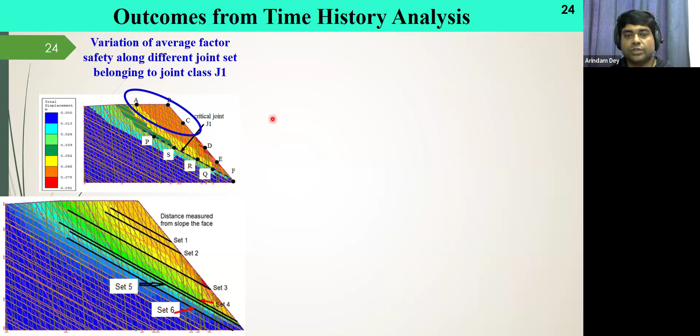So what we did is that we considered various joint sets: set 1, set 2, set 3, set 4, set 5, and set 6. We figured them out as these black lines, and we found out the average factor of safety. Average factor of safety means over this entire failure plane, over these black lines, we selected points, found the factor of safety, and then made an average over all the points on this failure line, because as I mentioned, they keep on varying.

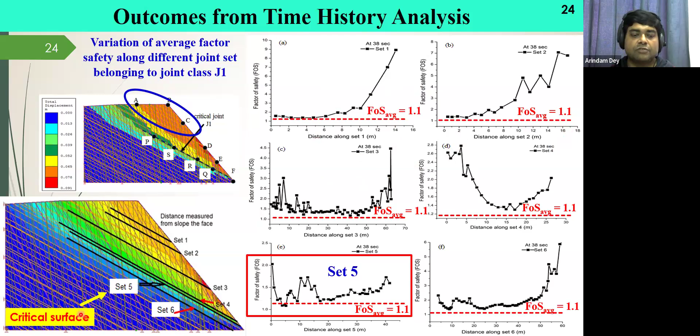When we plot the average factor of safety and draw the line of average factor of safety equal to 1.1, remember that 1.1 is one of the limits that we consider for seismic rock slope failures as the limiting criterion. Except for set 5, in all the other cases the average factor of safety is always greater than 1.1, which indicates that set 5 is potentially the most vulnerable of all these sets, and that will lead to the failure of this entire rock slope, especially the upper part of it. So if you do such an exercise, you can find out which is the critical joint set that can fail.

The next interesting thing is which portion of set 5 will fail. Why does this become important? Because there is a basic difference between the failure planes of rocks and soils. In soil, homogeneously, we consider it from the crest to the face. But in rock, especially in a jointed system, because the joints are present, the failure surface can change direction wherever the weaker planes of joints come into the picture.

That means each point will not have the same factor of safety. That means when we say that the critical joint is joint set 5, this will fail. Only a portion of it might also fail and not the entire J5 from the face or the toe up to the crest level. Can we find out which portion? Yes, again, we can find out which portion.

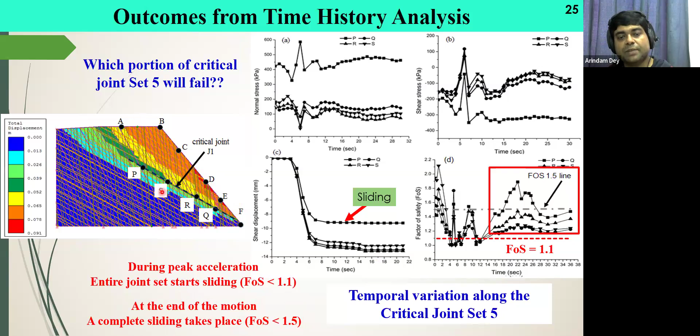At the very end, we also look into the last interesting thing, which is called topographic amplification. It is nothing different from a simple amplification. The seismic wave amplifies. When you give a motion at the base, it propagates to the top. Because of the reduction in confining pressure, there is higher energy, so it amplifies. And this seismic wave amplification can induce instability.

What becomes interesting in a jointed rock slope is that because of the joints themselves, there might be local amplification which keeps on adding up. And that is what is called topographic amplification. Some waves can reflect back from the joints, and they all can add up to give a very huge amplification, which might not have been the case if there were no joints in the system.

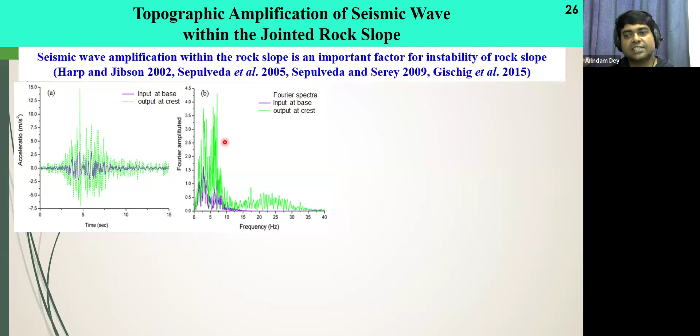So amplification will be there anytime, but the interesting thing, as I was mentioning, is when we compare this amplification with joint and without joint: when you don't have joints, the amplification is much less than when you consider joints in your model.

So these joints give this local amplification which adds up, and that leads to much higher amplification in the system. And that's when the rock blocks from the top start dismantling, detaching, and falling off. So this amplification of seismic waves not only depends upon the path of travel, it also depends upon the geometry of the slope, the material contrast, because we have solid joint material, joints crisscrossing each other, and the internal fracture of the slope. So all these lead to topographic amplification.

And there can be situations that because of this high amplification, the joints open up, and that can lead to the trapping of energy, and that can lead to the failure. So as mentioned, amplification of seismic waves in intact rock and jointed rocks are different. Jointed rock produces much higher amplification than the intact rock system. So when we do analysis of dynamic response of jointed rock systems, this very important point we should never ignore.

We should always find out the response in terms of how it would have been if there were intact rock. What is the benefit? If you are able to figure out that there are some joints which are vulnerable, you can grout those joints, induce cohesive materials, make them more rigid, and then you can actually reduce the topographic amplification, and the slope can become safer, apart from the external mitigations you want to do.

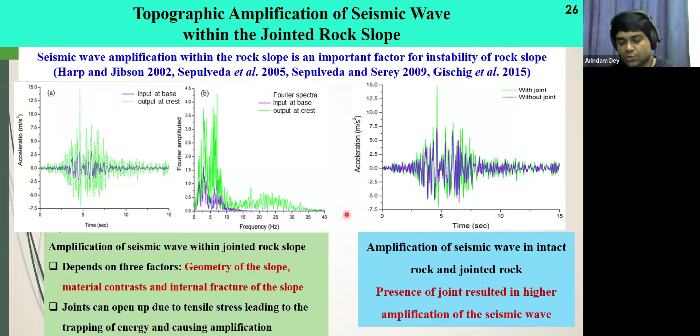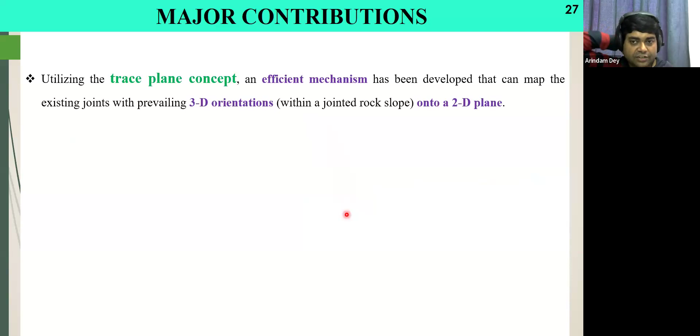So from this entire exercise, what I have shown and discussed, we made a very nice contribution in four different aspects. We used the trace plane concept, the basic engineering drawing concept, to convert 3D things to 2D things. Otherwise, there are complex ways of doing that as well. This is an efficient mechanism which you can use. As a teacher, you probably always teach engineering drawing, and you can make use of that knowledge. We identified the failure surface of jointed rock based on the stress mobilization at joints due to the seismic load, as I showed from the shear strain diagrams.

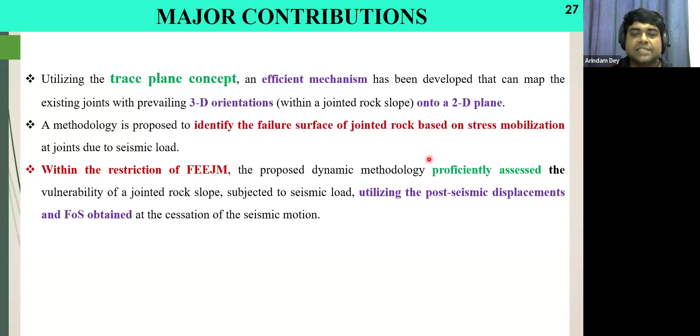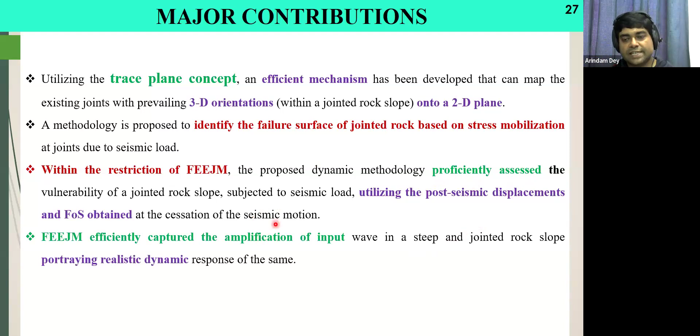And with that, I will definitely acknowledge my earlier student, Amalesh Jana. He is now a faculty member at Montana State University, USA. It was entirely his work that I have shown you today, and we gained so much knowledge, and that was just from an MTech work. So that was an immense contribution which he made during his master's.